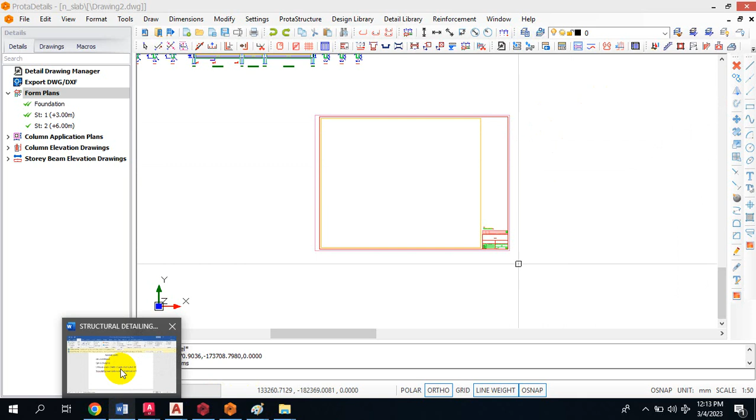Today I'm going to be showing you how to truncate a beam using Protastructure.

Let's jump right into it. In a case where you have some beams that have a great number of spans and it exceeds your template which you have here.

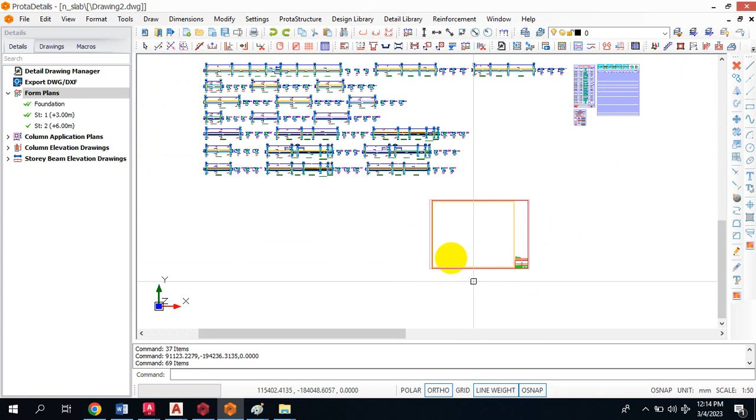This template was generated by Protastructure. You can get your template from here. If you click on this sheet, it comes up. You can pick any size of paper you want to use, like A3, which is the normal size we normally use for printing our structural drawings.

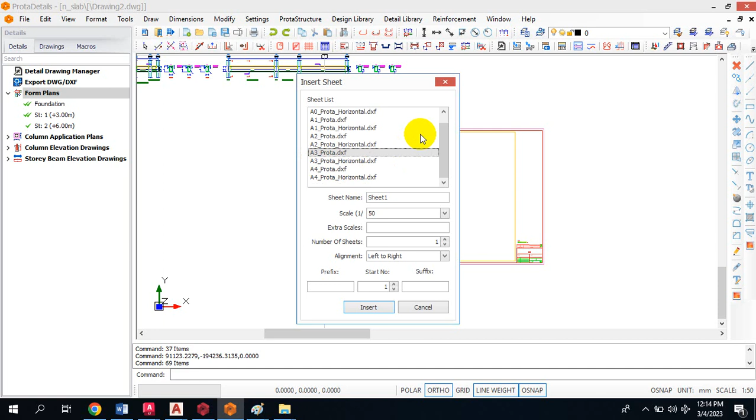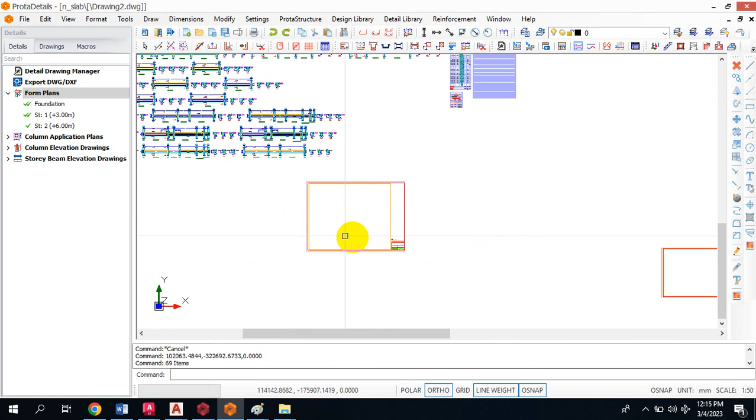So if this is what we pick, you can as well select the scale. Let's come back to this again. You can change the scale to, let's say, 100, and then we drop it here. If this is the scale we are using, I'll take this off. This is large, but let's say I'm using this particular scale just to demonstrate this faster for us.

There are cases where your designs have beams that are very large, that is, the span is very large. For example, if you are designing a building that has a span of, let's say, up to 25 meters or 28 meters.

But let's say you have a very large span of beam. In that case, fitting that beam into your sheet might be difficult, and even when you are able to put it in a sheet, by the time you print that drawing, it's not definitely going to come out clearly.

There are some dimensions you will not be able to see, you will not be able to see most of the dimensions. When I started designing earlier, I encountered a lot of challenges like that before I could understand what I was doing.

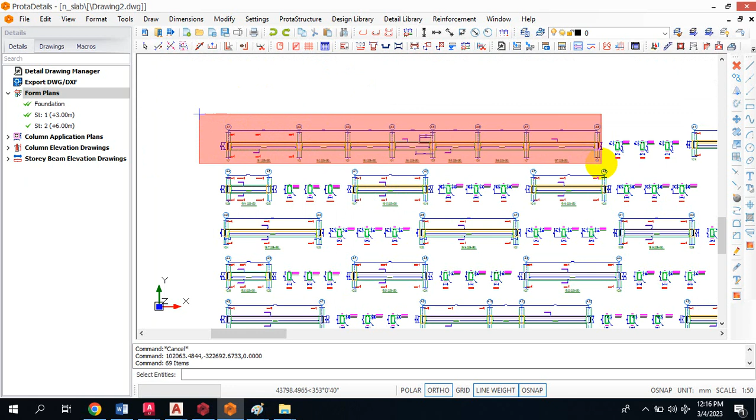So let's say I'm moving this particular beam, and I want to fit it into this particular sheet, but this is actually exceeding the size of the sheet, and let's say I don't want to go more than this size I already have. If I rescale this particular beam, it will most likely enter this particular sheet.

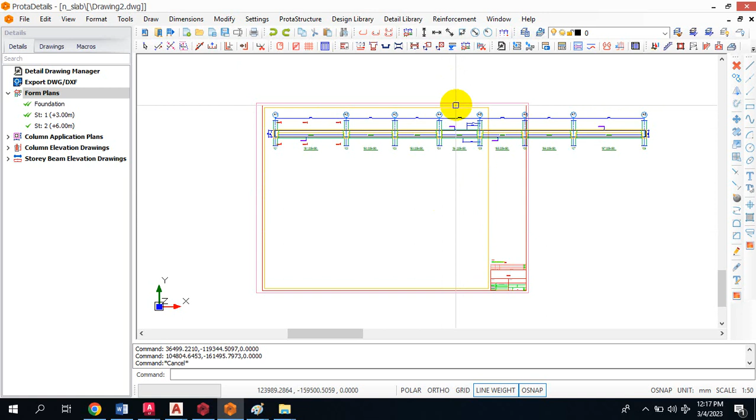But in a case where you have a very large span, there's every tendency that even when you fit it into the sheet, when you print, you are not going to see those dimensions. So in that case, it is advisable you truncate this particular beam.

It's more like you blowing the beam up. You can actually fit in the actual size of the beam where it's supposed to be in a sheet, then come down and probably truncate them. In essence, you are blowing it up so that by the time you print, it's going to appear very well in your drawing.

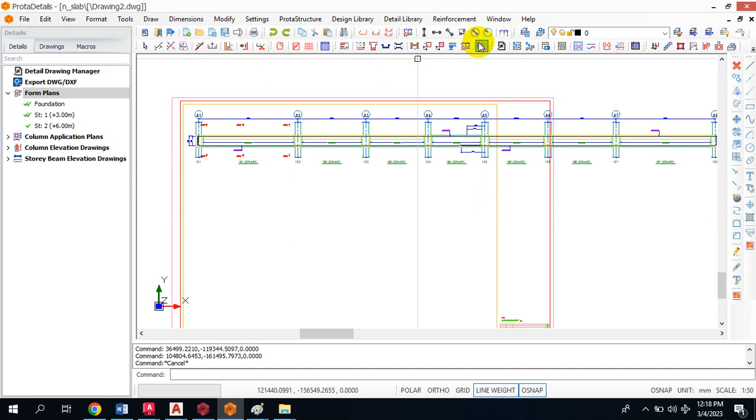Alright, let's jump right into it. All I need to do now is come to crop beam elevation. If I click on this, all I need to do is click on 2 points.

Down here at the left hand corner of my screen it's telling me select first point. So all you need to do is select your first point from anywhere, let's say I'm picking from anywhere.

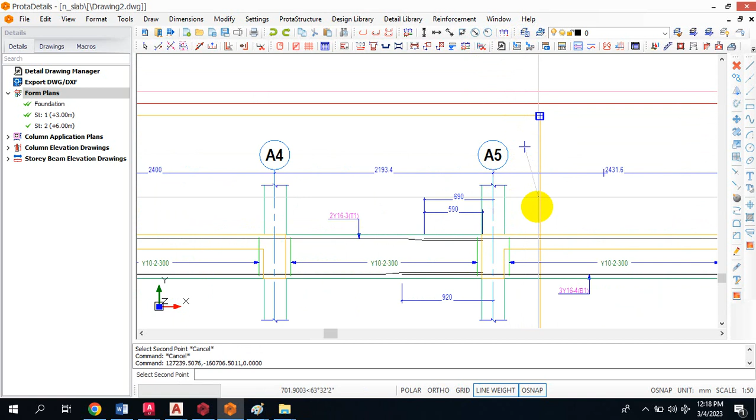If I pick here, all I need to do is hold Control in order to get a straight line, or I can click on ortho mode, and then my line is expected to be straight. If I use ortho mode, it's going to give a straight line.

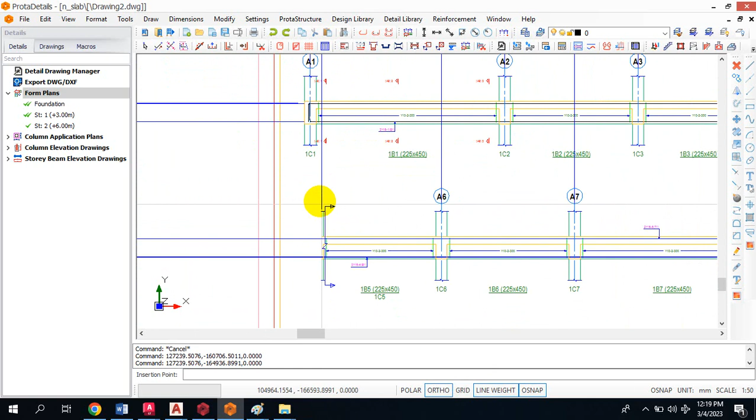If I click the second point, you can see this particular beam has been successfully truncated. You can see an arrow pointing, telling me that we're able to cut this beam from here, and this other arrow showing the other direction.

All I need to do is redimension all of this particular beam. I can redimension this, and you can as well achieve this right here from your ProtaStructure itself.

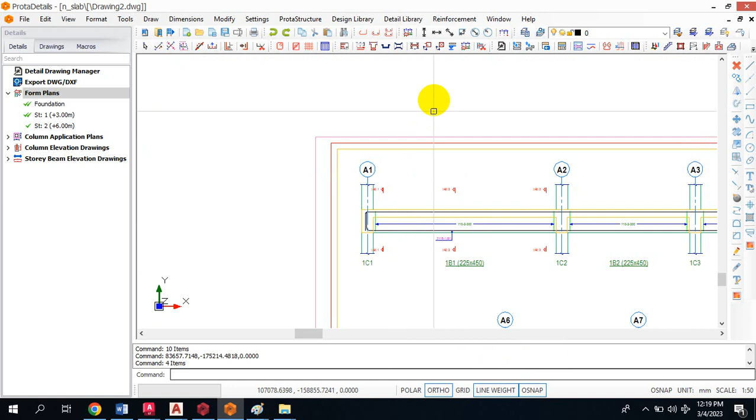You can see horizontal dimension, vertical dimension. So whichever dimensioning you want to achieve can be achieved here in ProtaStructure. You can redimension all of this directly from ProtaStructure, even without taking it to AutoCAD itself.

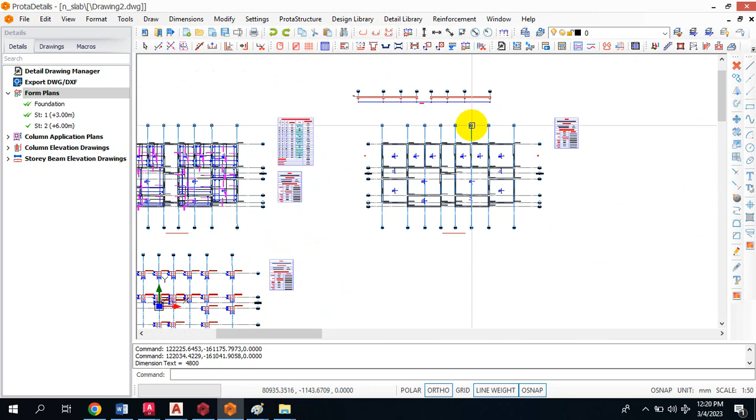Good thing for you to know is that ProtaStructure now has an automatic detailing feature, where if you click on automatic detail and click the second point, then click here and click OK, you can see automatically it has generated detailing for us. Amazing, right?